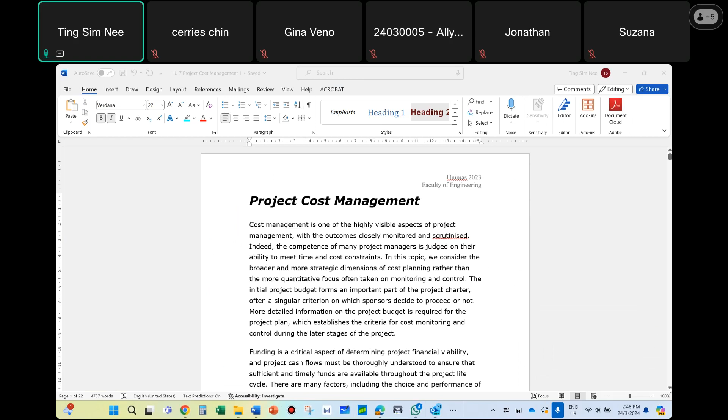So yes, cost management is one of the very important aspects of project management of any project, to be honest. So what happened is it is another component of time.

That is a critical success mark of a project, whether you're a good project manager or not. Basically, the consideration usually comes from whether you can actually fulfill the project within the budget that was allocated, and then within the time that is given to you, to the satisfaction of the customers or to the satisfaction of your client. So these are the usual 3 objectives that we want to meet for most engineering projects, for most civil engineering projects, for any construction project. Time, cost and quality are the typical things that we are talking about.

And if you are all engineers, I think you are all working on site. This is something that we don't really have to repeat 10 times, 20 times, especially for those of you who just graduated as well. I think we have been putting a lot of emphasis in any project management course on time and cost as well. Yeah, so it's a general overview about how important it is.

But here I want you all to really understand that cost management is not just when you finish designing the project and then you go to the QS, and the QS comes up with the costing, comes up with the preliminary budget, and then comes up with the BQ, and then sends it out for tendering. And then when you've contracted the tender, this is the construction cost, you pick the contractor, and this is your final construction cost. And then that's it. And then you start to do cost control, cost monitoring.

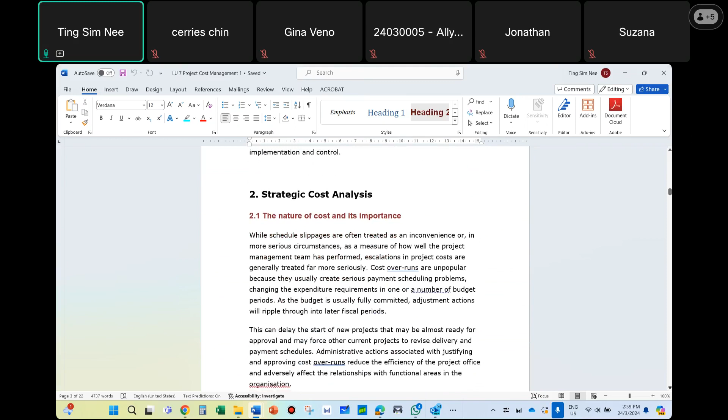The second bit here, we are also looking at two particular things. Costing is not only about coming up with the budget, but there are two distinctive areas: one is the pre-commitment stage, one is the post-commitment stage of the project. So what do we mean by pre-commitment stage for the project?

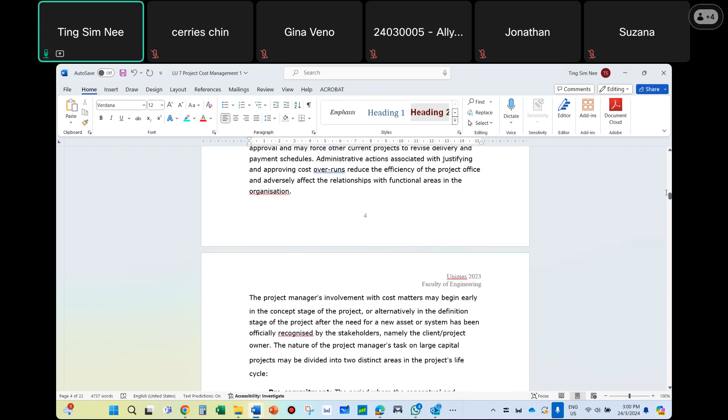If you want to really look at your whole cost planning, your strategic cost planning, one of the beginning parts is to actually look into the pre-commitment stage of the project. That is whereby you need to look at the conceptual phase, the definition phase, the idea schemes. This is something I've just spoken about, to be clear about what is needed, and then to have some form of cost expectation.

So at this pre-commitment stage, if you have to draw a very specific line, it would definitely be before tendering, before procurement. It generally would be along conceptual all the way to feasibility study. You need to have a cost, you need to have a field cost definition.

Normally at the very beginning, you will do the conceptualization - a very brief, quick estimate, it could be historical data, it could be analogy estimates, that sort of estimate to do the job. Then as you move on and compare options with options, you must have some form of components available to your project already, and you can use something like parametric studies as well.

In parametric studies, we compare a few parameters. For example, is it a 2-lane or 4-lane road - the lanes will be the parameters, and then you may have another 2 or 3 parameters to work out the costing for that option versus other options kind of studies. Then, when you're looking at feasibility studies, you're also looking at technical details - coming up with some form of details, not a lot yet.

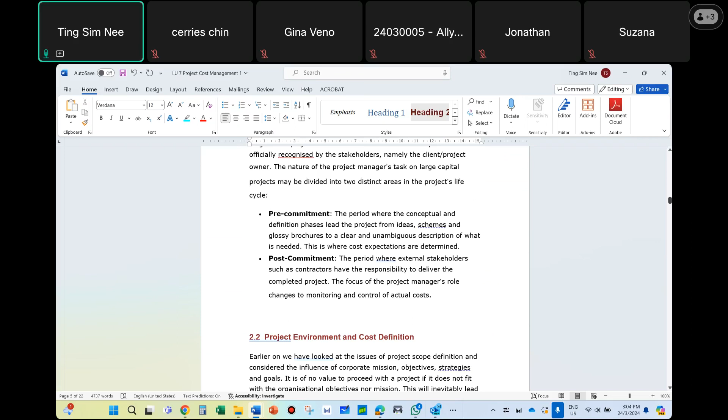Okay, so before we go into that, I also want to mention that this is the pre-commitment stage, so you're formulating it. The other thing I want you all to think about is the option of whether, up to that stage, do you want a lease or buy decision? That will be a very important thing for your organization to think about.

Let's say you're supposed to build your headquarter office, this is the project, and would you rather just rent like 10 shops to do that? Or would you rather build your own, which is considered a buy decision? Or would you want to lease? Leasing means rental, they're always used interchangeably.

But rental is usually for residential properties, whereas leasing is usually for commercial property or anything to do with machinery and buildings or land or properties used for commercial reasons. So we usually use the word lease rather than rent. Rental is usually for machinery, small things, equipment. So it's used interchangeably, but we'd like to use rental more for residential buildings, like apartments, condominiums, houses, and all that. So there's a bit of difference here between lease and rental.

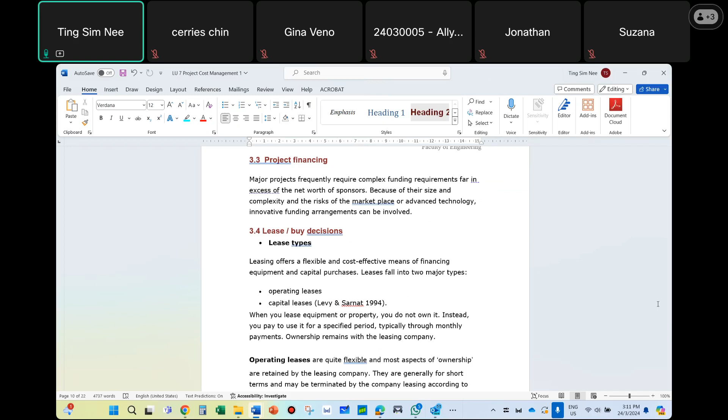There's a lot of implication here because leasing does not require a huge capital outlay. It doesn't require you to go and construct and come up with a few million dollars to do it. But leasing - I mean, if you actually want to construct and purchase it, purchase means, like usually when we say buy, it means we're going to embark onto a full construction project. That is our buying, the term's buying here. So when we're going to buy, we have a lot of capital outlay, and this capital outlay is not good.

Yeah, capital outlay is basically - how do I put it - it's a project. It's a project that will move the economy. It will give you what you need. You own the project. So basically, when you own something, you can do whatever you want with it.

You can build it and then decide to sell it later, correct or not? You don't have to, you can change a lot of things. So when you want to build something, yeah, you do have a lot of big capital outlay, but you have a lot of decision. I mean, you can be a lot more flexible. You can say, I want to change now from 2 stories to 3 stories. I don't want anymore, I want to build an apartment later.

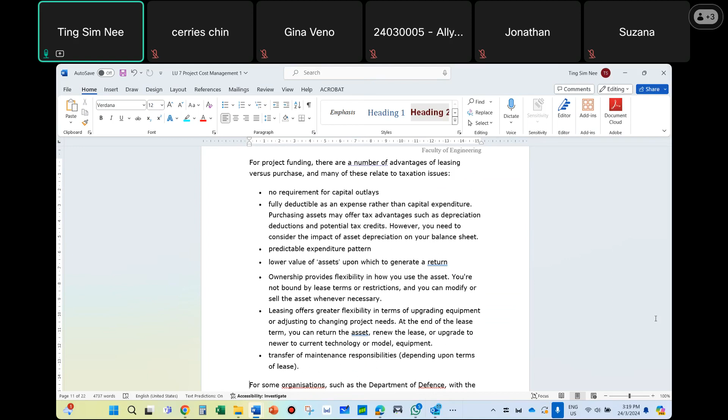So if it's not possible, then leasing may be an option. That means buying, or what we call constructing, is out of the picture. Okay, so if they seriously want to consider buying or constructing, then it's about the funding. This is what we call project finance, the financial viability studies bit dealing more with the finance, normally. But there is not such a clear line like, oh, this one I have to go and talk to my CFO, the CFO is in charge, I don't need to know anything. It's not like that. It's the integration of engineering and finance.

So one of the most common ways of raising the funding is the company themselves. Do they have that kind of cash flow? That is the basic question, correct? Okay, so if my firm made a few millions last year, I have got some retained profits. I want to put these profits into this new project, and I need to fund it over the next 3 years for the construction, before we can sell it and all that.

So these are equity, coming from the own company, okay, retaining, I mean, things that are from the original company, like the shares from the own company that are translated into dollars and cents. These are all money that comes from your own company and your own cash flow. Okay. But of course, nowadays people don't really take their own money and go and invest.

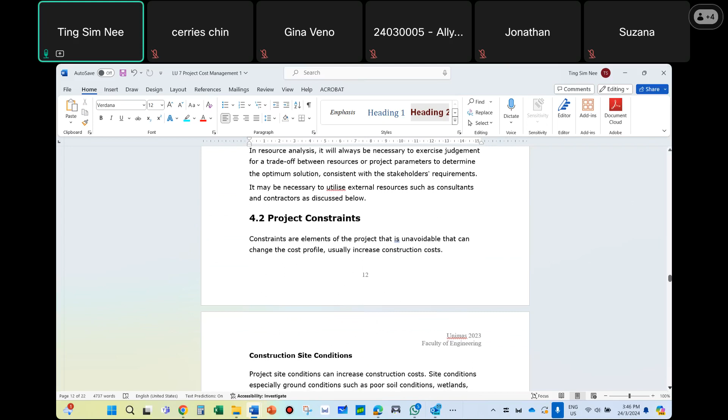Okay. Then, of course, the constraints, we need to watch out for a lot of things. Site is definitely a constraint. A lot of construction projects bust the budget, not fulfilling the cost, because of latent conditions. Latent conditions means something that you really cannot foresee. So you did not check the site conditions properly, and when the project is ongoing, you end up with a lot of additional costs.

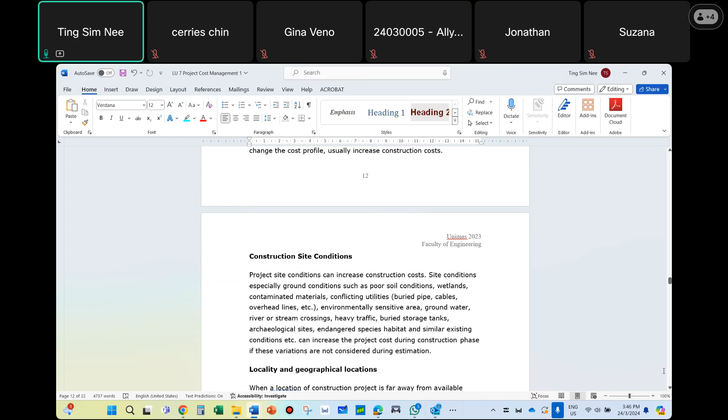So yeah, checking the site condition, doing site surveys, doing bore logs, doing catchment studies, all these are actually essential. Weather studies are very important for drainage work, anything to do with water and drainage. It's very essential to study the sources, the catchments, and all that. And of course that will have an impact on the cost later on.

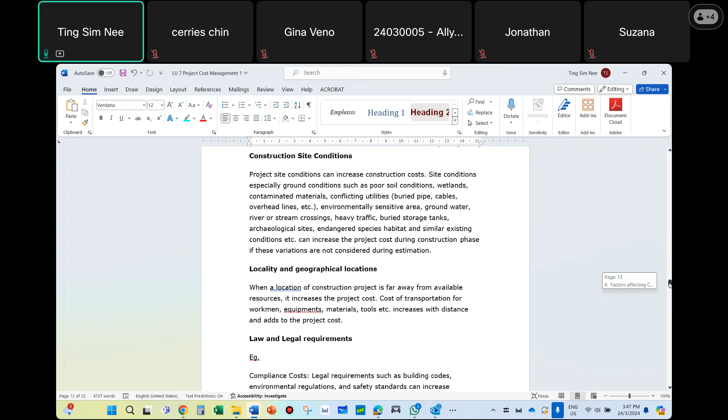Bigger requirement, geographical location, yeah. Doing a project in Kuching and doing a project in Ba'kelalan or, I don't know, Belaga or something like that, is a very different thing because of logistic costs and geographical locations. Doing a pipeline next to a river or across a river compared to just on the road is a very, very different story. Okay, so depending on the project itself, the cost will be different.

So why am I pointing this out? Because a lot of times, with capital expenditure, capital outlay, or what we call construction costs, we like to take construction costs from previous projects, and we do not take previous projects that are quite similar to whatever we are embarking on. So that gives you very off-rail historical data. You cannot take a Kuching project cost and apply that to Bintulu or Miri or even Sibu.

We generally want to go apple to apple, area versus area, rather than a completely different geographical location. Because you built one here before, you take it, and that's what QSs do. They take historical data and pump in the new numbers, the costing doesn't change that much, they just dump it in the rate and do the calculation, and that is why it is not accurate. So you need to look at that as well.

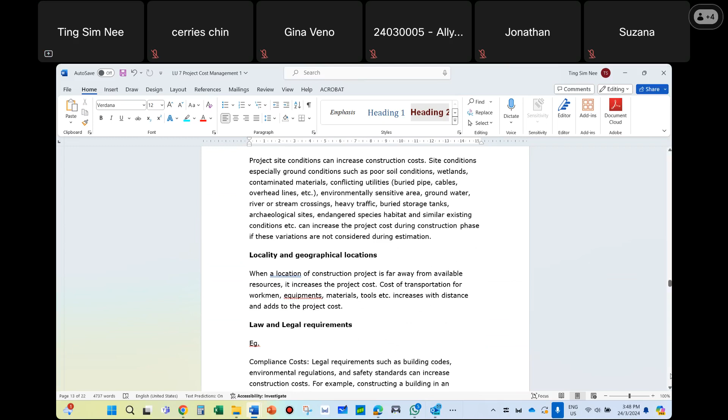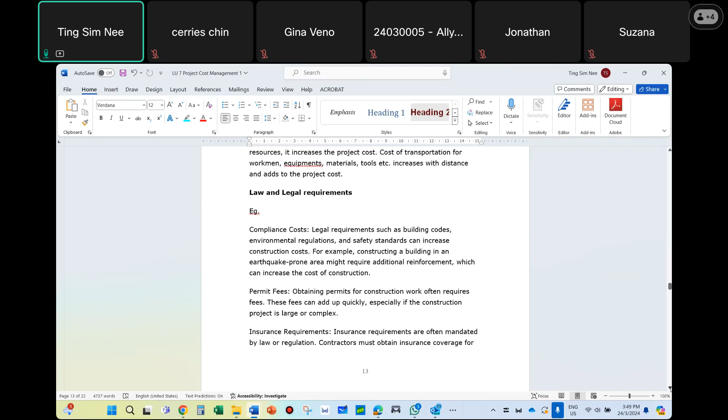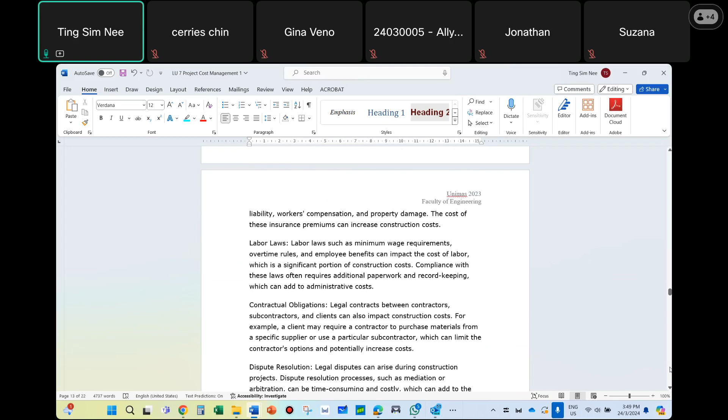Different areas differ, and working in Kuala Lumpur, West Malaysia, is very different from working in Sarawak. Sarawak is very different from Sabah. Okay, and of course, regionally, labor law and all that is similar, but minimum wages and all that are applicable. So you've got a lot of different rules and regulations involved. And then other authorities. This is very important, because in some areas, if you involve other authorities, there may be costs involved.

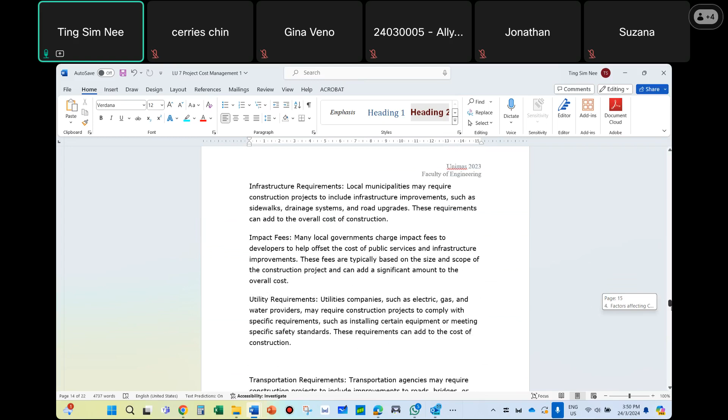Let's say you're building something that may involve SEB. Some areas involve JKR, some areas involve councils, and their requirements are different, and the impact fees they charge are different as well. There's also transportation; some agencies like JPJ, the transport agencies, or the police may have something to say, and there may be different charges depending on the type of project. So these are other authorities and the possible costs that come up because of authorities you didn't think about.

So when you look into a project at the very beginning, under the feasibility studies, these are the things you really should think about before you move on and actually do costing calculations or scheduling work. This is exactly the same thing you think about for time and schedules as well, because if you have an authority requirement and they don't give you the way leave, you cannot proceed with the work. A lot of time is spent getting permits, and you end up with project delays.

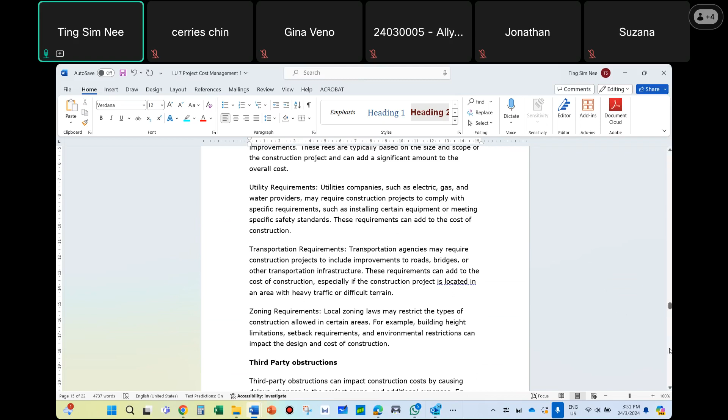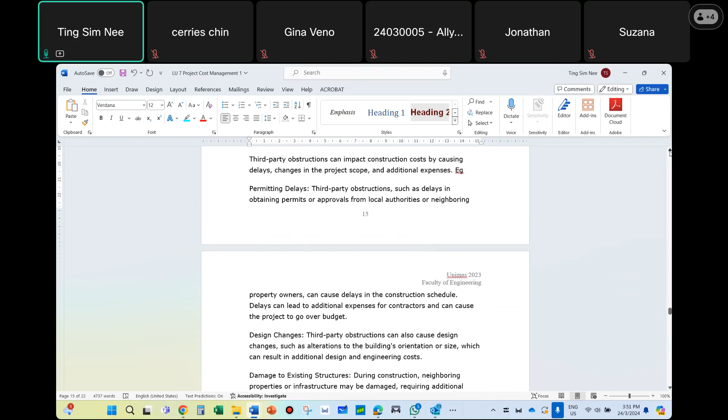So I honestly think that at the beginning stage, the project environment studies will also look into these sorts of things before you can embark on project management at all. You see, you need to understand your project. Then third-party obstructions will also affect cost and time, because you may have people from the kampong not allowing you to go across their land or cut down their banana trees or their kelapa sawit, that sort of thing.

And then you may have native landowners, neighboring property owners that are going to make complaints and call the police and put a stop to your job and all that. And then there may be existing structures underneath, or properties where you don't even know who the owner is. It's always been there. So should you take it off or not? If you take it off, later on somebody may come after you with their parang or send you a lawyer's letter saying that you illegally trespassed on their property.

So sometimes when you try to look for the owner, you cannot find them because the land itself has been empty. The children are all overseas, and when you put it in the newspaper asking who is the owner of this particular house or structure, nobody says anything. So it can create huge issues as well.

So we call that third-party obstructions, and pipelines or gas lines, manholes that are used for utilities. Sometimes they're inactive already, so do you need to take them off or not? So it's very difficult to tell.

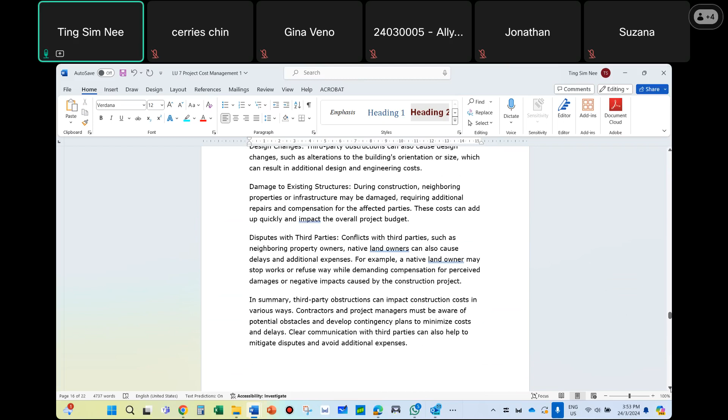So these are things that can also affect the cost of the project, because you may have to spend a lot of time and a lot of money trying to dismantle it as well. Not only dismantling it, asking for permission to dismantle can be an issue as well. I'm sure some of you have faced this before. So these are things that you need to think about.

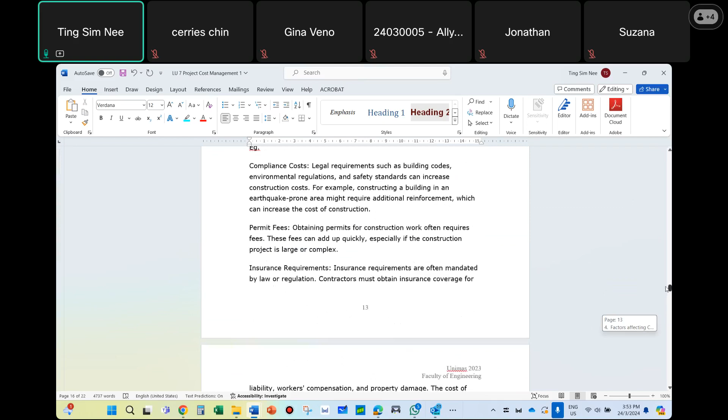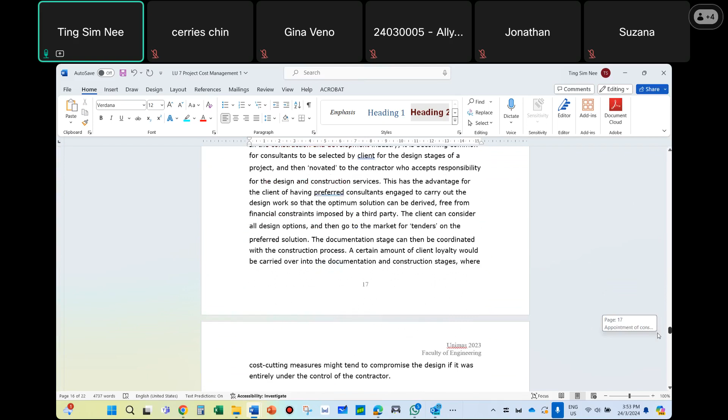These are the things that you need to think about: project resources, whether you have the resources, the constraints, the designers, the consultant, the procurement, and the contract selection type. It warrants careful consideration before you select the contract type. Different contract types will actually bring in slight differences in the prices as well.

And what we mean by slight differences is like 1% difference, 1% of 1 billion and 1% of 100 million. That's a lot of money, even if it is 1% or 0.5%. It may look like a very, very small percentage, but you cannot afford to have anything. It's a lot of money involved towards the end, which is the capital expenditure. We can do a lot with 0.5% of 1 billion or 100 million, or I think even 10 million.

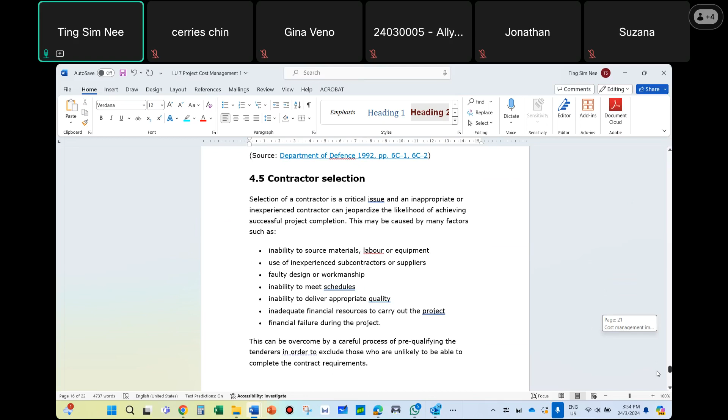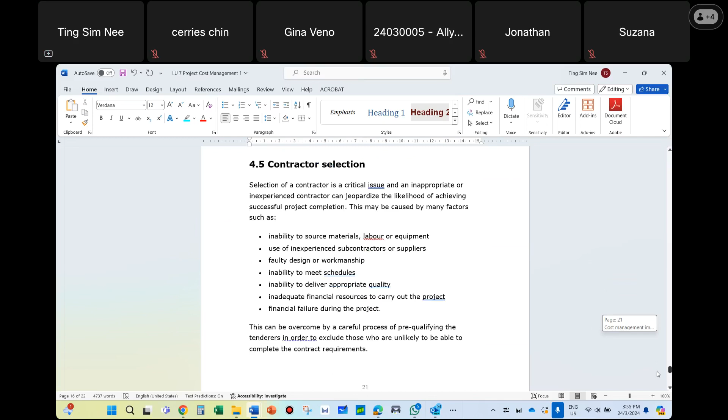So contractor selection, of course, there are many factors involved: their ability, their workmanship, their workers, the efficiency, how many workers they own, or whether they subcontract out. That's a very dangerous kind of situation. You don't want that. So there is a lot of impact here on the final costing outlay.

So it's something that we want to study at the very beginning, when you are doing your environmental scan, your EIA, or your project issue analysis, and then doing your big chart, that 3-layer chart that we talked about in the last few weeks. These are the things that you need to think about already at those stages, so that when you come to the costing bit, you're already aware that these things may affect the final capital expenditure.

Whether you're going to make an extra 1 or 2 million or a few 100,000 or not, sometimes it's just a little bit of difference in your strategy, whether you're aware of the constraints, or whether you pick the right contractor, the right designer, or use the right procurement strategy. That will make a lot of difference. It may look like a 0 or 1% kind of difference, but like I said, when the project sum is big, 1 or 2% is a lot. In the end you may make extra millions from it. Okay.

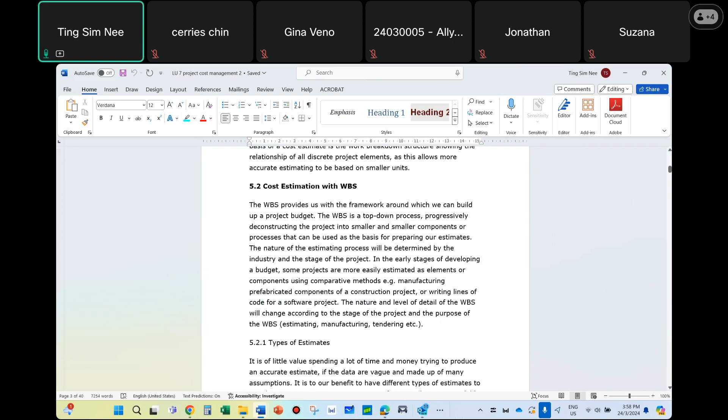So the product breakdown structure, PBS, and also the WBS, it will be related to different stages of the project, and then that will be related to different kinds of estimates. So in the beginning, whereby it's just a yes or no, I'm going to build a bridge that is going to be estimated at least 4 lanes or 2 lanes over 2 km, something like that. That is your product basically.

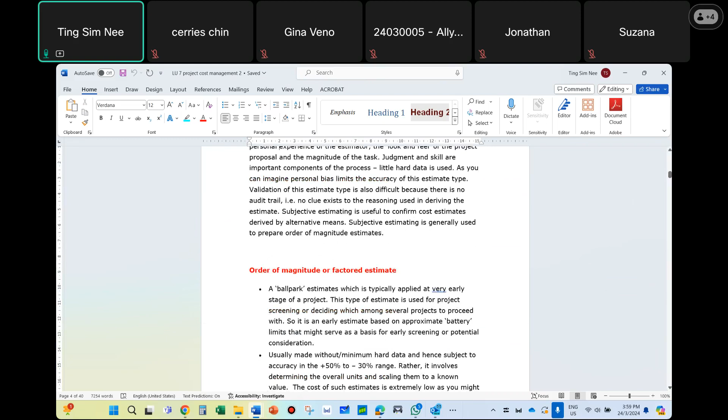So at this time we will usually use something like a very simple expert opinion, just to get a look and feel kind of data, because you don't have much data. With that kind of thing, with few words, you ask somebody who is quite an experienced estimator or somebody who's done a job before, you can get an idea of how much it will cost. So normally these people will tell you it's going to be about 1 km, you need to spend about $1 million, for example.

So that is a very subjective estimation. But another guy may give you 1.2 million, another guy may give you 1.5 million, another guy may give you 0.8 million. So it's not really accurate anyway, but it's to get some idea about the capital expenditure, or the construction cost.

Then after that, we will go into a more ballpark, a little bit more detailed approach. You can also use this at the beginning if you have enough information. This is fine if you get it during the conceptual part. It's probably better than expert opinion. If you can do an order of magnitude or some form of a factor estimate, I think that would be better compared to an expert opinion.

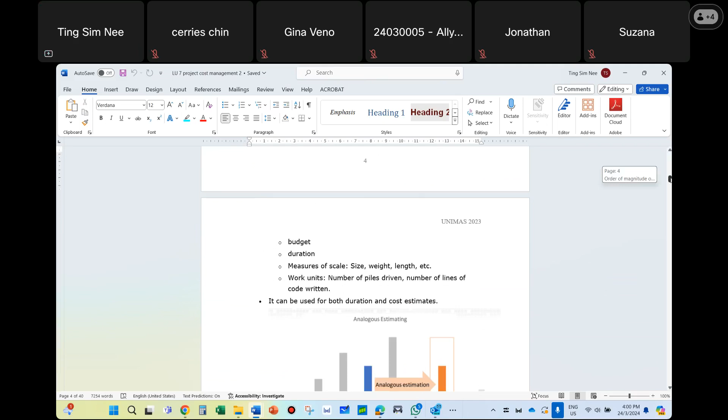What we will do here is generally use what we call analogy estimates. Analogy estimates is basically, you've got a range of different projects, and then you find one that is the most similar to yours, and then you do a direct projection onto the new one. So let's say mine was building 100 houses. There was another project I built in Cebu that is close to 100 houses, actually like 90 houses over there. So now here I'm going to build 100 houses, so I can use an analogy estimate. It can be a direct translation, a move-forward direct translation kind of thing, like what is shown in the graph here. It can be like that if you have the exact same thing, but normally you don't.

So what we will do is take the old project and come up with a unit rate for it. Then from the unit rate, we project it onto the new project quantity. Let's say 90 houses, mine is 100 houses. So my previous project was actually 45 million, and my construction cost was 45 million, and I've got 90 houses. So one house is costing about $500,000. Then from there, I will project it onto my new project. So my project now will be about 50 million. So that is how I will do the calculation. We call that analogy estimates.

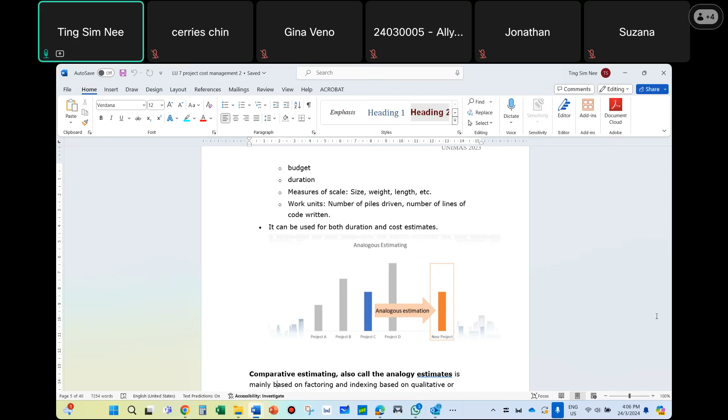We all know that at the conceptual stage, our calculation should always be a bit higher, or quite a lot higher normally. If you estimate too low, it's dangerous, because the client doesn't like to later find out it's actually a lot more. If we estimate a bit higher and end up with less, that makes everybody happy. So it's always better to over-factor than under-factor.

QSs also have other methods, especially for building work - for example, they look not only at numbers but also at floor area, which is definitely a better description than numbers, because numbers could be the same while floor area differs, since some houses are designed bigger, some smaller, and some aren't the same type. So my suggestion is, for building work, use floor area or enclosed area - meaning one enclosed space. What is the enclosed area?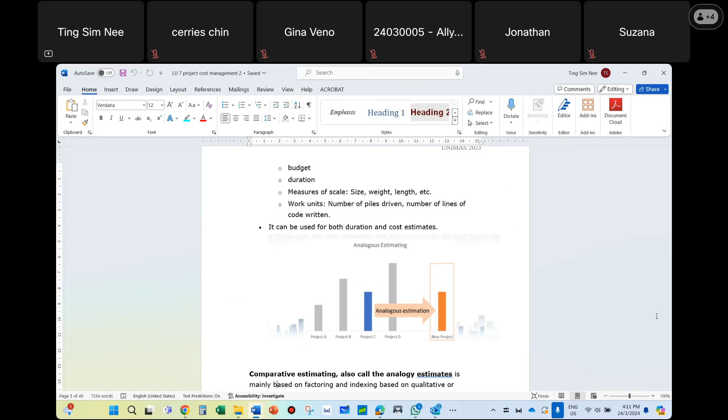If your projects are quite similar with one another, this may be a good option, using this formula. And then after that, let's say in your preliminary studies, you've already come up with some form of components, the different components to the project - then we could actually try to use what we call parametric studies.

Parametric studies is also related to some form of analogy, but analogy is usually based on only one unit - whether it's numbers, meter, km, and all that. But when we talk about parametric, you will determine a few components to your project. So for example, for manhole, you have manhole numbers and also the pipeline length - that is two components, then you can use parametric studies.

Then let's say for structure, you can use enclosed space, or you can use floor areas plus wall area - you can use two different parameters here. Or you can use concrete with steel bars - that could also be a few different parameters in terms of material. So it depends - you can split up into different parameters for your project as the known parameters that you've already got some form of quantity for, meaning you must have a few components that are quite ready for calculation.

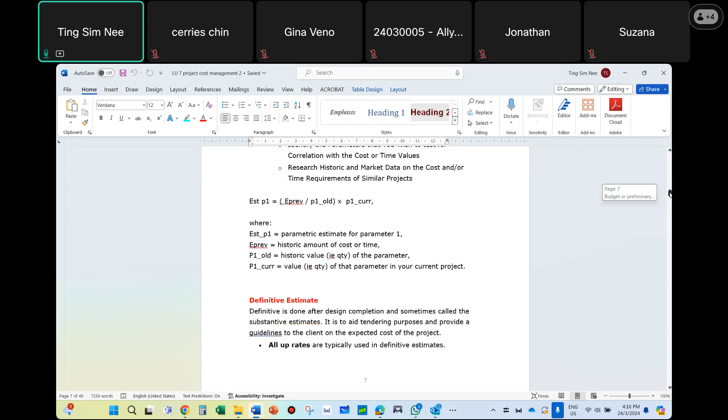Okay. Then of course we have definitive estimates, whereby you are looking at the all-up rate. All-up rate means that within the rate itself, you've already calculated labor, machineries, and also material for 1 unit. So for 1 unit, you create an all-up rate, and this is a rate that you have to come up with. Once you create the all-up rate, it will be applied for all concreting work, all steel work, all manhole work, all pipeline works, or all drainage work, for example.

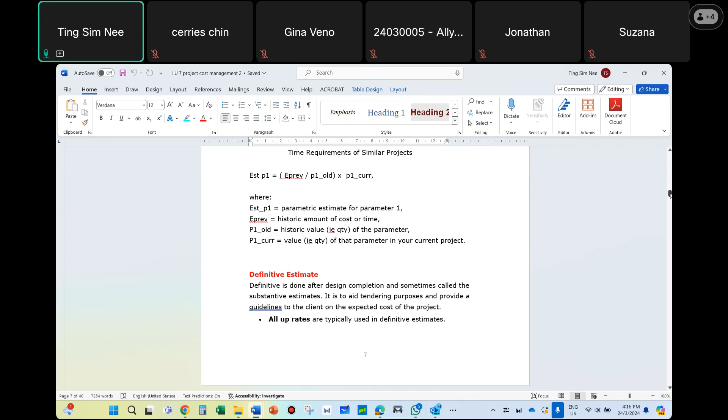So that all-up rate is more detailed. It means that in that all-up rate itself, you've already taken some of the historical data and converted that to different components of your job, and then come up with one specific rate. It can be something like this actually. The unit cost to do furnishing is 2,300. The swimming pool unit cost is like this. A parking lot, one parking lot is 1,100. This rate here is already inclusive of everything. Okay.

So you need to come up with, let's say I'm doing 1 meter square. In that 1 meter square, I need 2 guys working. I need how much material? I need what machineries, and how many units of this machinery, and you convert all this material, labor, and machineries into a per unit rate. So this 1 meter square, for example, will take me one day to complete. Everything is based on one unit. 1 unit, 1 day. So these are the rates.

So let's say the rate for 1 meter square of parking lot is actually 200 ringgit. Then your parking lot is what? 2 meters by 5 meters, maybe, or 4 meters. So that is about 4 times 2 is 8 meters square. You've got 200 ringgit for 1 meter square, and you've got 8 meters square. That will be about 1,600 ringgit. So that will be your unit cost. And if you apply it over 150 parking lots later, that will be the cost. So this is how we do the calculation, something like that.

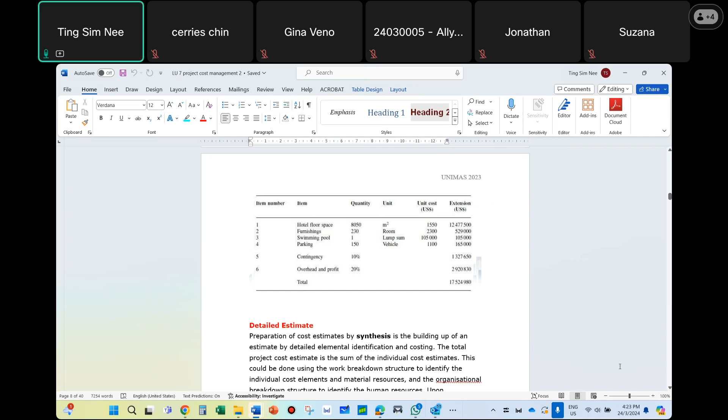All right. Then, of course, coming up to the detailed estimates. This one is something that every one of you must know how to do, because with the other method, if you're not in the planning area, you may not be so in touch with it all the time. But if you're in, let's say, a developer like some of you are at the moment, you may be more involved in the initial preliminary costing work and all that.

But I think detailed costing work is something that all engineers are trained in, and you must learn how to do this properly. And your assignment involves doing this, okay? So what you need to do is

of course, when you do detailed estimates, pretty much the drawings are out already. It means that the design is completed or near completion already. Otherwise, you absolutely cannot do a detailed estimate, okay? So what happens is you must have a work breakdown structure.

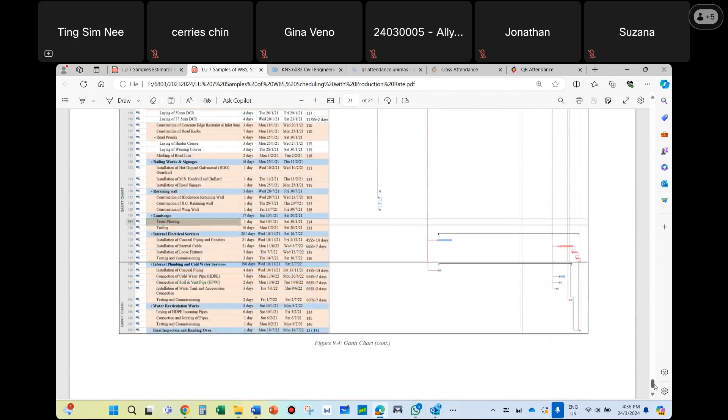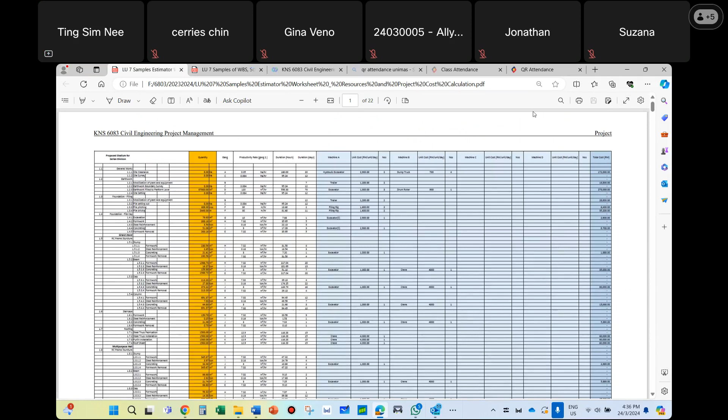Shouldn't be that much off, but it will make a bit of difference. So what happens after that, you will punch into... yeah. Well, this is not the right one.

Yeah. So I give you some samples here. I've given you some samples for the rates for soil. This is something that is sometimes a bit hard to find. So you can take this as a sample, and see the different soil testing rates and all that. Yeah, then this one here also is the productivity. Okay, it's a productivity. This is something that I want you to take note of. The upper page is actually almost similar to the one that I showed you just now.

So let's say now you are going to convert whatever units. I mean, now you're going to convert your activity duration and also your productivity rate, all these things, your resources number into your, sorry.

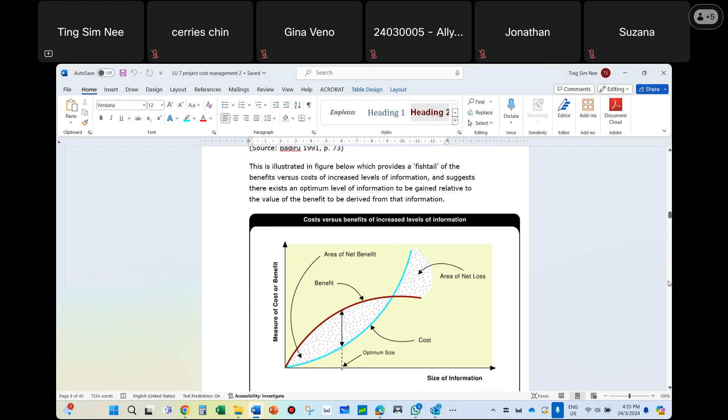Okay, so the accuracy of the calculation is very, very important, and that relates to the information that you get. So once it's budgeted already, it means that you're already committed. The commitment is there already. So from pre-commitment up to commitment. So up until now we have committed. We signed the papers already. That contractor won the tender. We've done the cost calculation. Everybody knows this is going to be the capital expenditure.

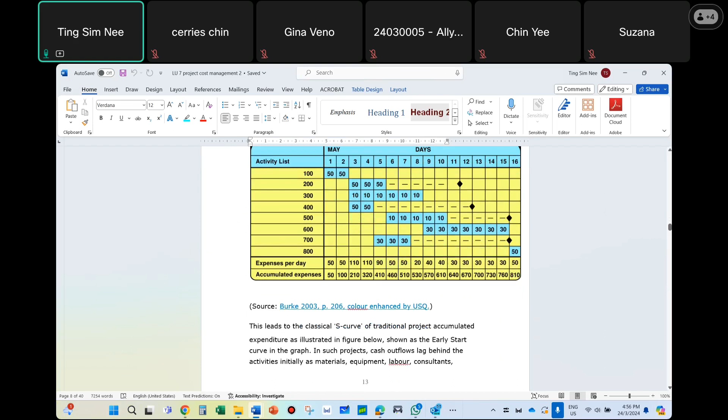The client would not tell you that I will give you more money if you don't have enough. It's rubbish. There's no such thing. So once it becomes a commitment, it's a budget, and that budget is something that you have to keep to all the time for the entire project. Okay. All right. I'm not sure how much you understand about S-curve and project control with the EV technique.

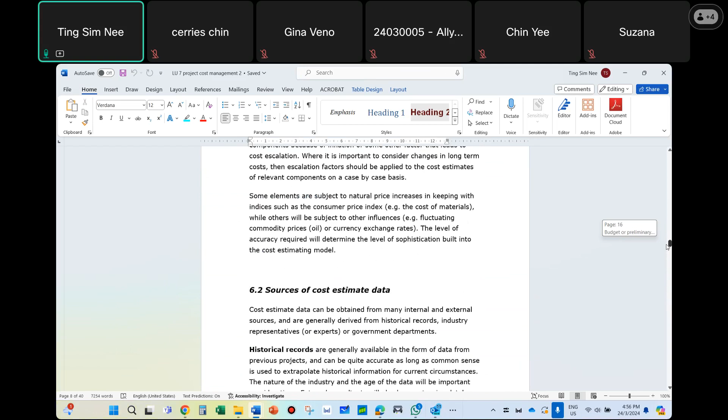Are you any good with S-curve? Do you guys know how to do S-curve? This is usually for budget control. So it's the post-commitment stage. Once you've got that, we need to arrange things like S-curve for us to do budget control. So cost control is budget control. We don't want to bust the budget, so we consistently keep the expenditure within the amount that we are committed to. So we use techniques like S-curve and EV technique.